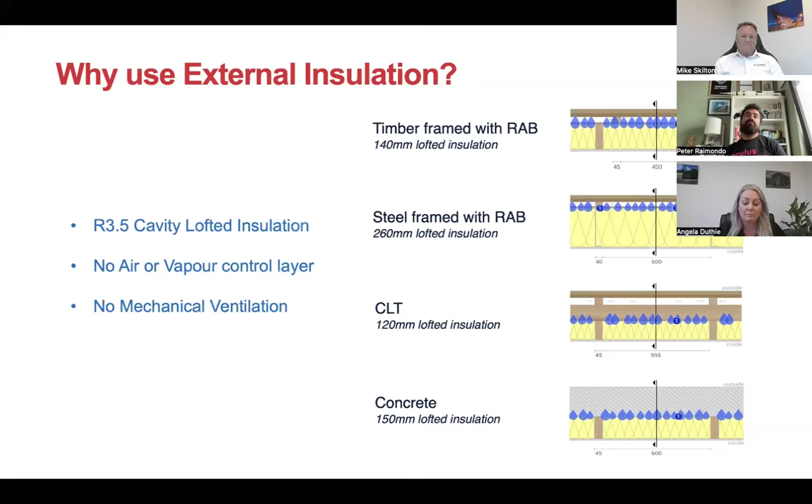Next slide. So what is Rockwool? Rockwool is manufactured from melted volcanic basalt rock. It's melted down, spun out like candy floss, and these thin fibres are laid in a way to create slabs in various densities. It's non-combustible, so it won't burn up to 1,000 degrees. So really great for fire design and protection. And it also gives protection to other combustible and structural materials on the project.

Rockwool also has really excellent acoustic properties, and we can provide STC and NRC values for the standalone product. And also being vapor open and water repellent means it won't absorb or hold moisture, it won't draw it in, and that long-term performance is unaffected if it does get wet.

The higher density of Rockwool provides the rigidity and long-term durability, making it better suited to external wall applications. Rockwool Rain Screen is a variant specifically designed for external insulation with enhanced water repellency properties, plus great thermal performance as well.

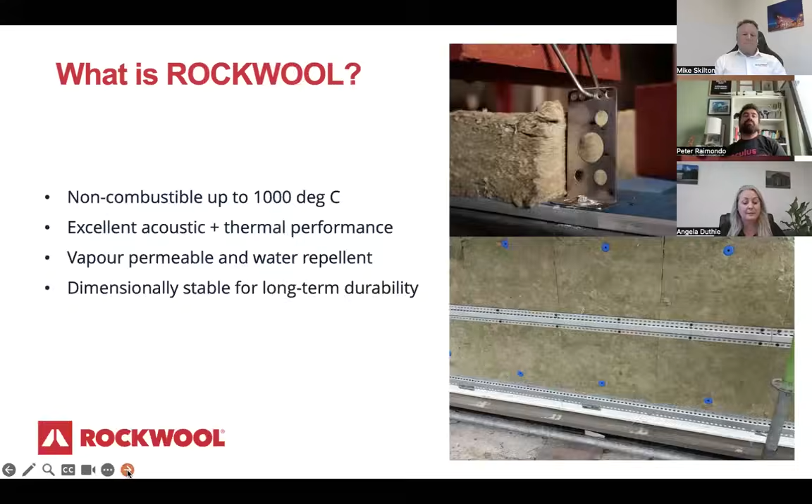Next slide. So Enertherm PIR, what is it? It's a closed cell rigid polyisocyanurate. This has a high performance foam core and a multi-layer aluminium foil facing on both sides. So it delivers some of the best thermal performance for its thickness, while also offering high compression strength of 175 kPa. So that makes it a really good option for warm roofs, external walls, and even flooring.

Because PIR is also highly moisture resistant, when the boards are installed correctly and all joints are fully taped, Enertherm PIR can be used externally. Actually, both PIR and Rockwool used externally don't require an additional building wrap over top. They can actually leave that off. Next slide.

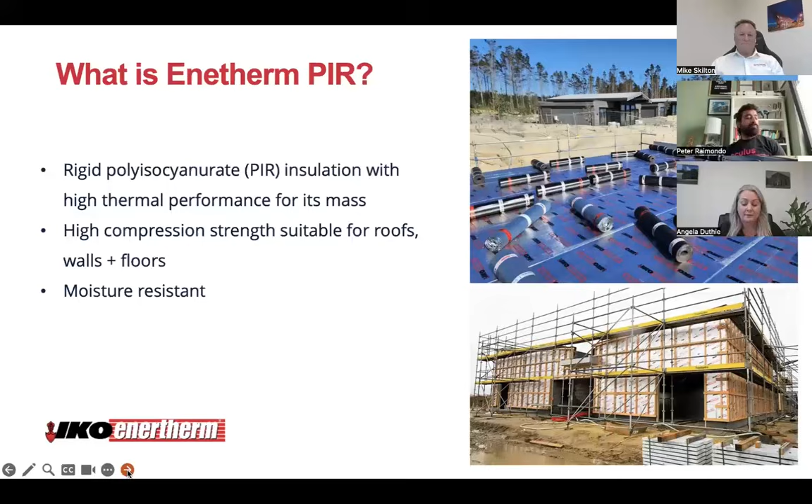So the perfect wall. Joe Lstiburek developed the perfect wall, and that ensures that all of the control layers are continuous and in the right place. In order of importance: rain, air, vapor, and thermal performance. Rain is always the starting point. Nearly all claddings leak at some point, so they're technically rain screens. That means your real protection is the cavity and your weather resistive barrier. That's your last line of defence against external moisture.

Air leakage is the next one. Go back the slide. So air leakage can move 10 to 100 times more moisture than vapor diffusion, showing why it is more important on the risk scale. And vapor control can be climate specific, but we need to ensure that the wall dries out, whether to the external, which is what Rockwool will do, or with a continuous ventilation system internally.

So Rockwool and Enertherm PIR are high performance rigid insulations, perfect for external insulation. Wrapping the building reduces the internal temperature extremes. So that's reducing your condensation risk, but also helping to extend the life of your structure and your components as well. So warm roofs and external insulation create comfortable and larger living spaces while also reducing heating and cooling demand.

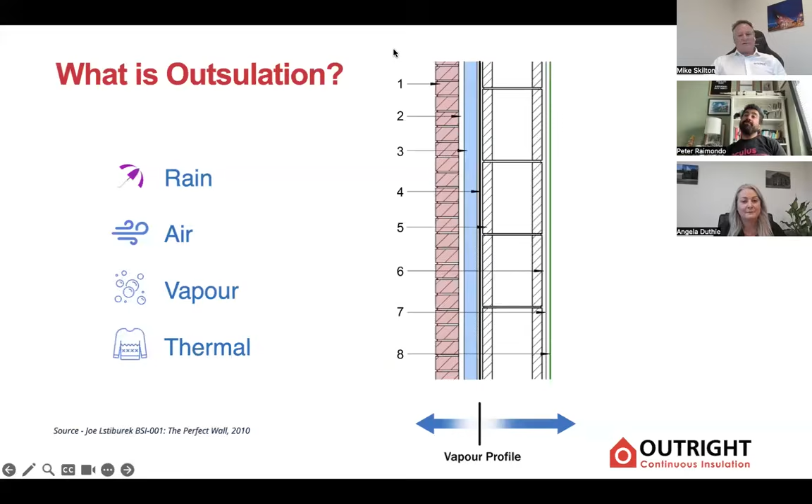Excellent. Thanks, Angela. It seems quite specific for external insulation and the product types being used in that. Look, how long does Rockwool last, as an example? Is it going to hang around for a bit?

Yeah, so in Europe, Rockwool's been around for a very long time. They did a study that took the product off the wall and retested it. That product was 65 years old and the performance was the same as when it had been installed. The other good thing is you could reuse your product, but also Rockwool can be used to grow seedlings in as well. So any offcuts or old product, you can still use it as a growing medium.

Okay, I understand. So it's gonna last the test of time. It's been around a long time. It's made of stone, yes, and it's a good fit for this type of application.

Excellent. Peter? Yes, sir. The man from Toronto. That's me. Not Kevin Hart, but another guy from Toronto. Maybe Woody Harrelson, perhaps. Yeah, maybe.

So yeah, I'm going to chuck the ball to you now, to get some really good insights into how we bring all this together, making sure that it's going to do what it says it does. So over to you. Yeah, absolutely.

We got a fun little picture on the screen, a little bit scary. It's a view of some damaged, this looks like concrete brick as opposed to clay brick, but brick nonetheless, veneer on a Gisborne house that must have had some sort of seismic event. And this is scary because you see the big cracks there. As you can see, the cracks emanate from the bottom corner of that window and go through the mortar joints upwards. And that's pretty typical for any sort of brick, stone, or veneer like this on the outside of a building.

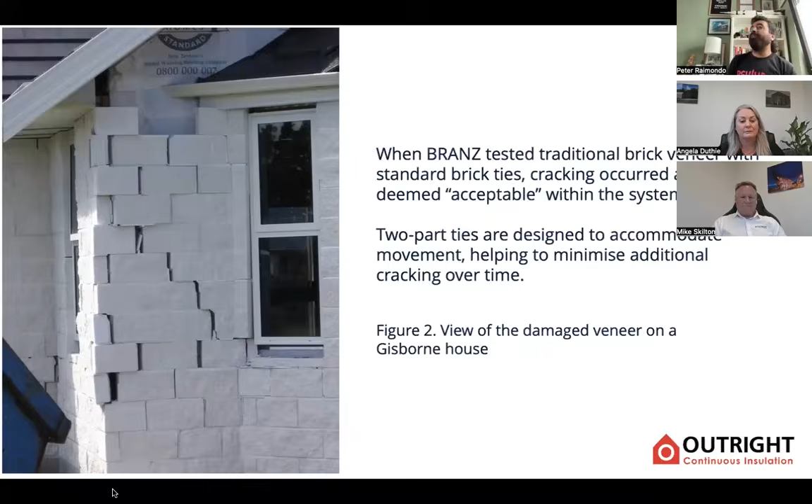If we go to the next page, you'll see some testing from BRANZ on a two-story building. It's pretty typical New Zealand construction. You have timber stud walls on the interior side and a brick veneer on the exterior side. They've racked or shaken this building side to side about 3.5 times the actual design level, which is why you see those gigantic cracks, once again, emanating from the bottom corners and the top corners of the windows. Those are the stress concentrations. When you have a hole in the brick, the corners are where the stress concentrates, and that's where the cracks come out from.

This test is showing a very extreme example, but it's really just to be more visual, because even at one times the design level, the level you're supposed to design for, those cracks will still be there. They just won't be as wide. And that's just how brick veneers tend to work. If you get a seismic event, you'll probably get these cracks in the mortar joint. They may be big, they may be small, they may open, they may close, but that's the damage you'll see later in the lifetime of a building. Now, when you're using a two-part tie, it'll accommodate that a little bit better.

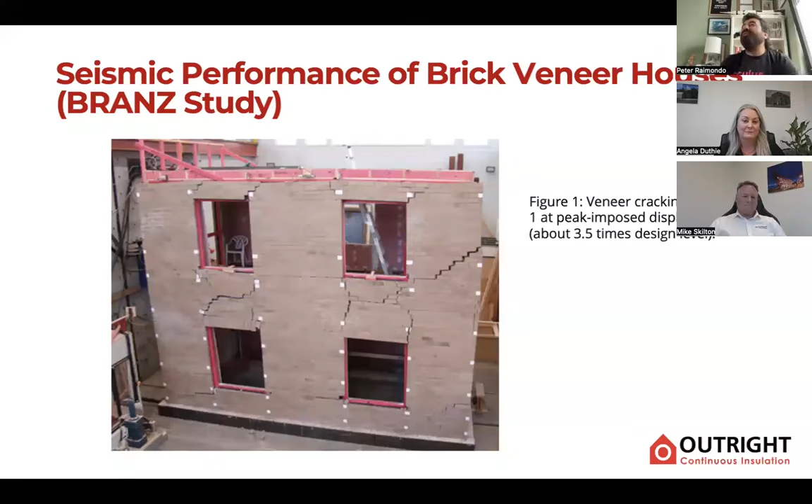But with the traditional strap ties, the key thing, even with a type B tie, which is a quote unquote seismic tie, is it's still one piece of metal that you screw into your stud, and then that piece of metal goes into the mortar joint. To accommodate seismic movement, the steel is bending, deforming, or dislodging from the mortar, which is a way to accommodate seismic movement, but not necessarily the most durable, redundant, or robust way to do that.

And if your seismic ties are being damaged or deformed after a seismic event, are they really something you can rely upon later on? Sometimes yes, sometimes no. It depends on the seismic event. And there's lots of evidence in New Zealand's history on which ones did and didn't perform, and in which conditions.

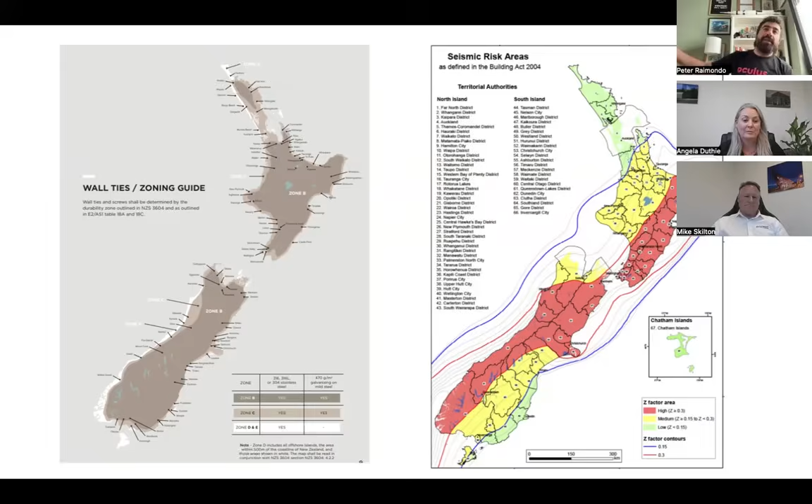Now, contrast that with a two-part brick tie, which we'll see on the next page here. You can see that there's two completely separate components. You have the thermal L plate that gets attached to the wall. You see there's 3 screw holes there. Depending on the zone that you're in, depending on the height of your wall, depending on a whole bunch of things, project specific, you'd be either using 1 screw, 2 screws, or 3 screws. In a lot of cases, especially in Auckland, 1 screw is more than enough.

But you can see that there is that L plate which gets attached to the wall. There is a V tie which is separate from that and slips into that slot. And what that means is that your V tie, which is connected into the brick mortar joints, can move back and forth, and it will go back to normal without damaging anything because it has that accommodation. It slides back and forth.

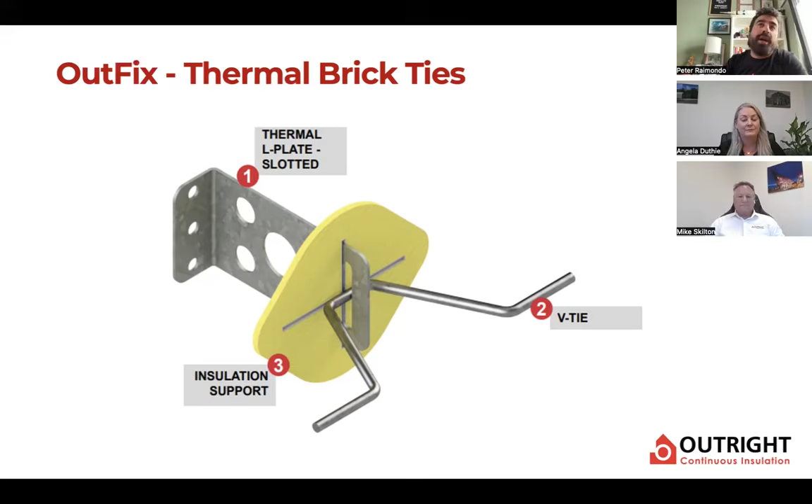The nice thing about it also is that you have an up and down slot, and that's not to accommodate seismic movement. That's just for construction tolerance, which means you can install a bunch of these brackets before the brickies have even gotten there. And then as the bricks go up, you can put the V tie into the correct mortar joint, and it gives you that construction tolerance up and down, which is pretty nice. And then the insulation support is another good portion as well.

And the nice thing about that is that it doesn't make things more complicated. You put your bracket on, you put your insulation on, you put your insulation holder on, and then you put your V tie on. And that's what holds your insulation, instead of having to put extra screws, stick pins, battens, et cetera. You don't have to glue it on or anything like that. The brick tie is doing that work. So it's not really adding cost and adding complexity. It's all just an all-in-one off-the-shelf product, which is pretty cool.

But the key thing to remember here is that because you have a flexible structure, typically here in New Zealand we use timber studs. Those are very flexible in comparison to brick, which is very rigid. And so instead of tying them together very rigidly with one piece of metal that is embedded on both sides, having the 2-part ties allows the studs to move behind that brick without imparting extra forces into the brick and possibly causing that extra cracking that you saw on those previous slides.

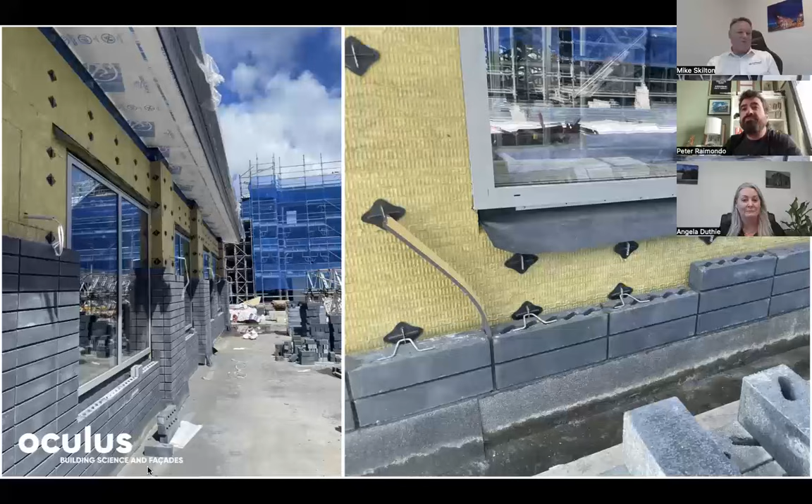So they're, you know, a monolithic sort of finish for the buildings, and it's quite an attractive option for the design profession. That's excellent. Now, Ange, we're going to flick back to you because you've got a building that's a work in progress at the moment. Can you share some insights into this one?

Yeah, so Hillmorton Hospital here in Christchurch, they're adding on an adult acute facility. So this is the latest development on site for their mental health hospital. This project does have specified Rockwool externally, which when you've got sensitive clients really helps with not just the thermal performance, but you're getting added acoustic values from external to internal and vice versa, but also that fire protection too. So protecting all the structure and the buildings from external fire.

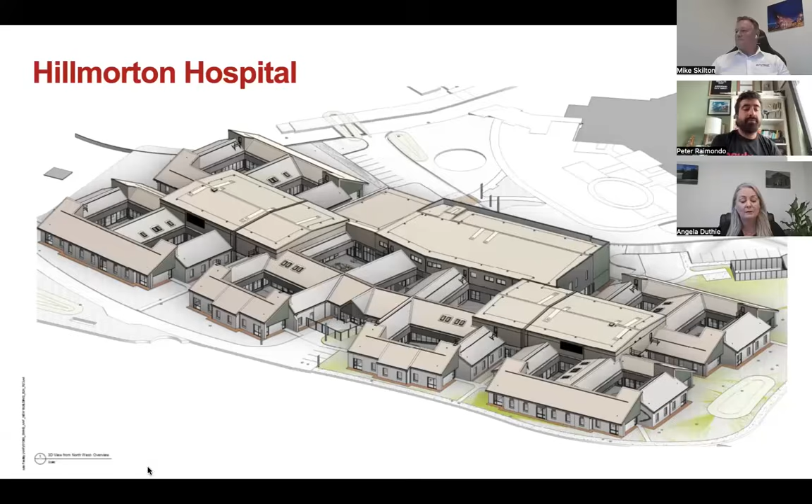If you go to the next slide, this shows the detailing for Hillmorton Hospital. Now, the brick is obviously sitting on the outside, then the 50mm cavity, and then we've got 50mm of Rockwool, and then your brick ties fixed through to the structure, and that L-plate insulation support is there as well.

So all of these elements can be interchanged and be larger or smaller, so the L plate can accommodate a lot wider insulation. We can also exchange the V ties for different sizes to allow for either larger bricks or larger cavity sizes as well. So it's not just a one size fits all.

So with this detail, you can see that they've got quite a lot of insulation on the internal. So Peter can probably talk to this a bit more, but when we look at it from a warm wall system, generally we'll go 70% or more of the R value on the external versus 30% or less. But on this example, it has been fully envelope engineered, and they've got air tightness and I understand probably full mechanical ventilation there, Peter.

Yeah, you can see the dotted green line there is the water and air tightness barrier, good membrane in there. Like you said, the rule of thumb is 2/3 on the outside, 1/3 on the inside in terms of R values, but you can absolutely work outside of that as long as someone checks it. You have to do a WUFI model, a hygrothermal model of some sort, just to make sure that it's all good for the specific place that you're putting it in. But if you don't want to do those checks, you put 70% on the outside, 30% on the inside of the R value, and you'll be good to go.

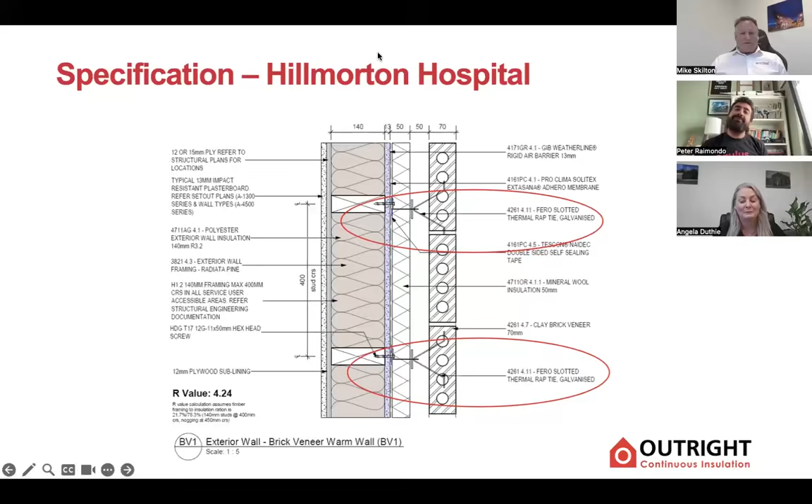Okay, well, that gives us a bit of a view of what's currently being constructed at the moment, and there's a number of other projects in the design works as well. So we are seeing a history of use for this type of construction in New Zealand.